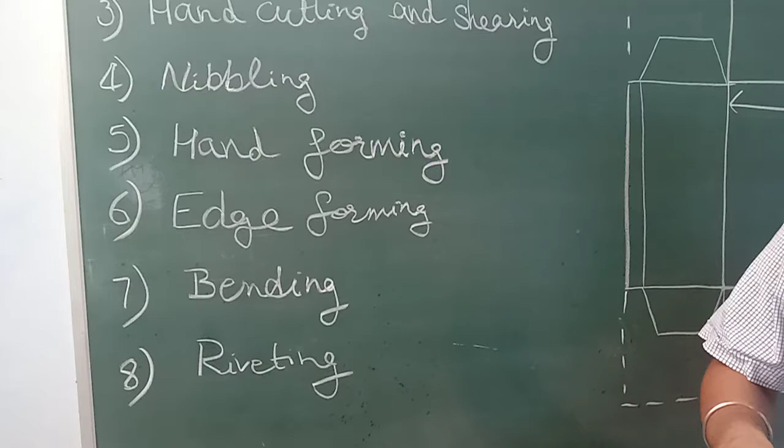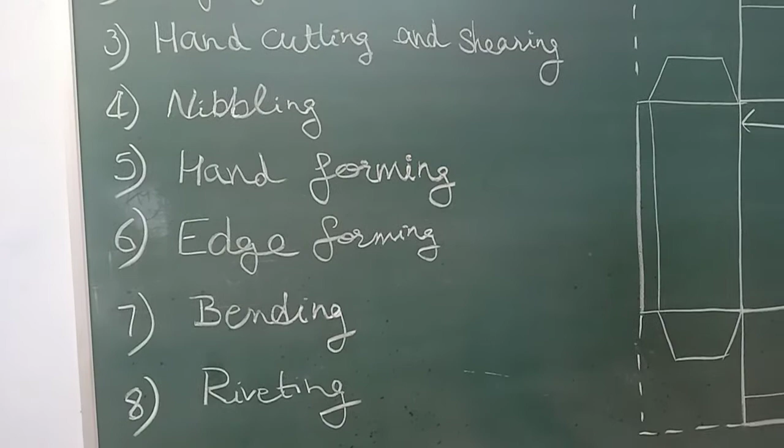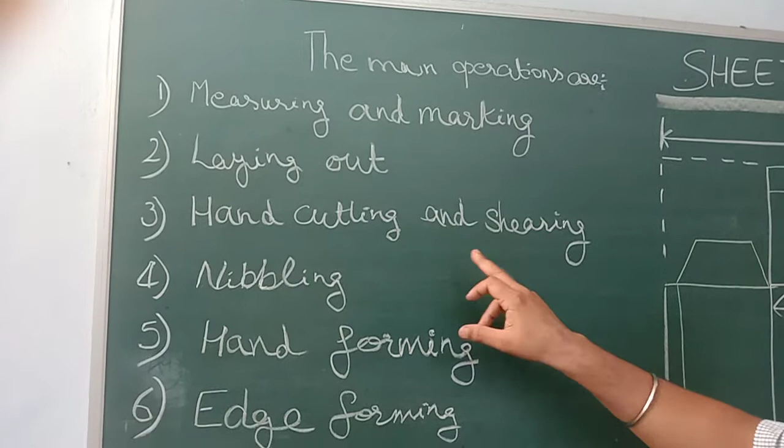Students, in our earlier video, we discussed sheet metal, its applications, types of sheets used in our sheet metal shop, and our first four operations while working in our sheet metal shop. These are measuring and marking, layouting, hand cutting and shearing, and nibbling. Now we come to our fifth operation, that is hand forming.

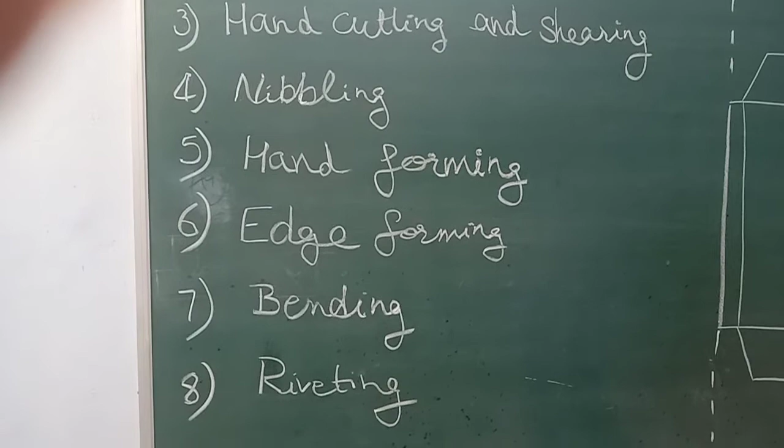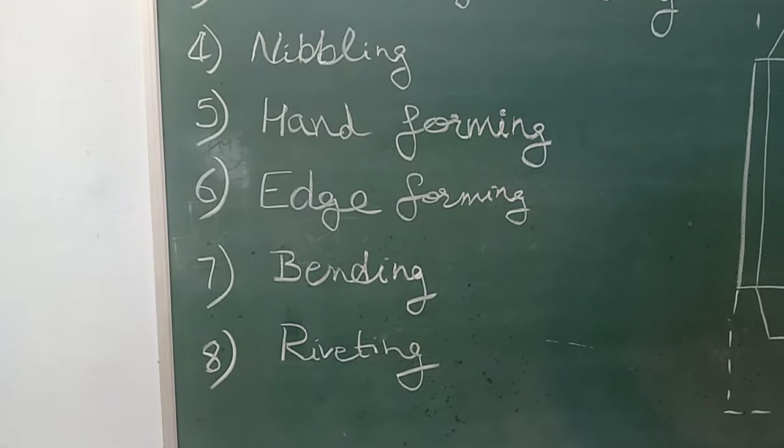Now, in hand forming, the term metal forming, hand forming, stands for shaping and bending of sheet metal in three dimensions in order to give the desired shape and size of the final product. After hand forming, we move to the next step, that is edge forming.

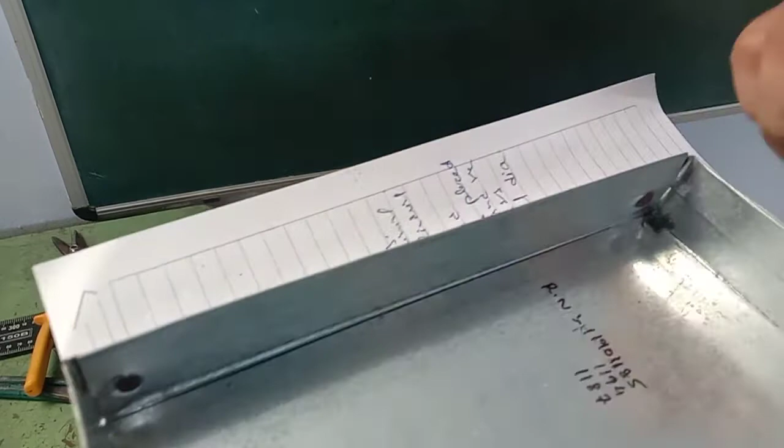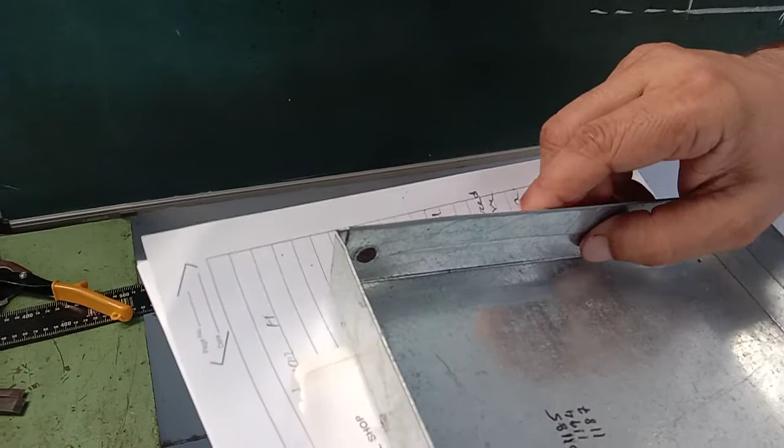The edges of sheet metal products are formed to ensure safety of hands while handling these products and to provide stiffness of the product. This is edge forming. Edge forming is important to ensure the safety of our hands because sharp edges of sheet are harmful for our hands.

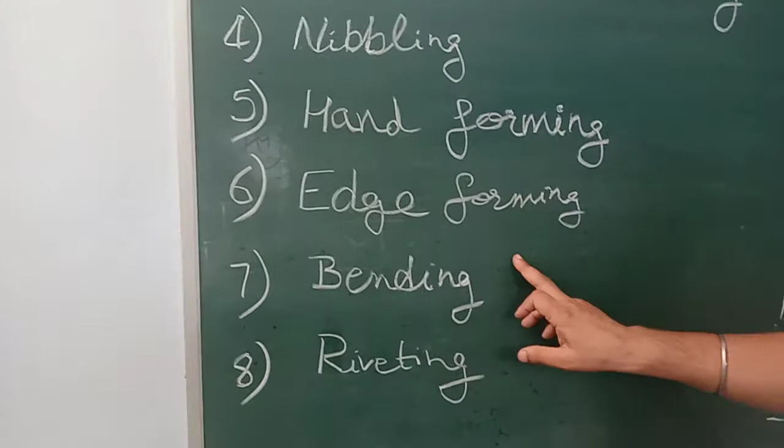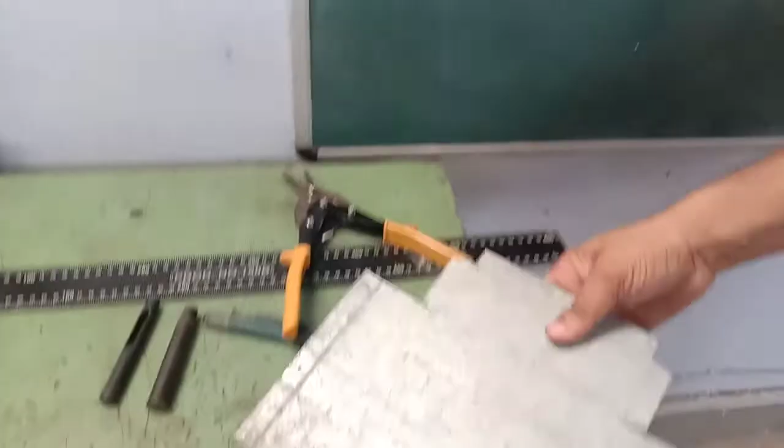Now, our next step or seventh step is bending. Sheet metal is required to be bent in different angles to shape it in the required form. This is how bending is done. Here bending is done at a 90-degree angle.

The bending operation involves stretching of metal on the outer surface and compressing it on the inner surface along the neutral line, which remains unchanged in length. Sheet metal can be bent by hammering over a base by hand or by means of bending or rolling machines.

Now, our final operation is riveting. Riveting is the final operation. It is a permanent mechanical fastening. A rivet consists of a cylindrical shaft with a head on one end, and the opposite of the head is called the tail. On installation, the rivet is placed in the punched or drilled hole and the tail is upset so that it expands to about 1.5 times the original diameter.

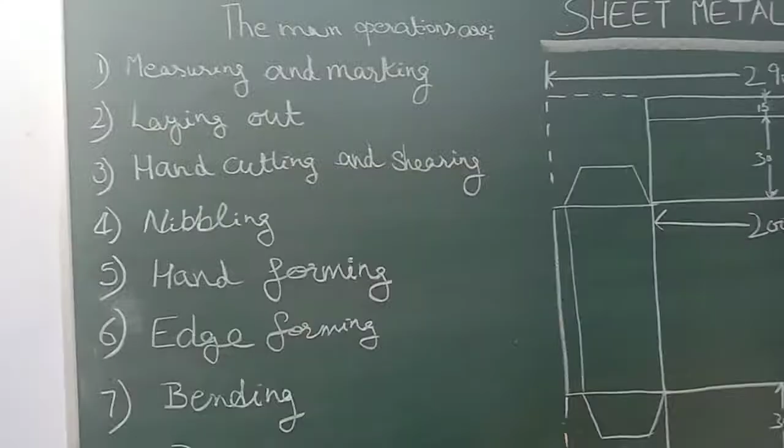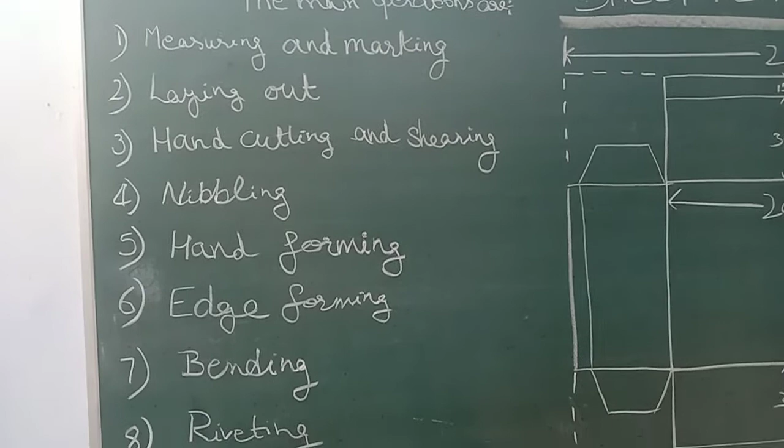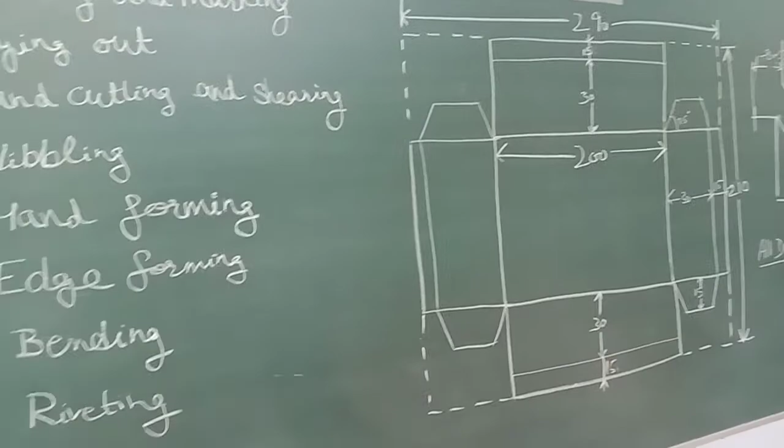Dear students, in this part and in the earlier one, we discussed sheet metal and its application and 8 operations, that are measuring and marking, layout, hand cutting and shearing, nibbling, hand forming, edge forming, bending and riveting. These 8 operations are required to complete our job work, that is our rectangular box. This is our rectangular box, our finished product from the sheet.

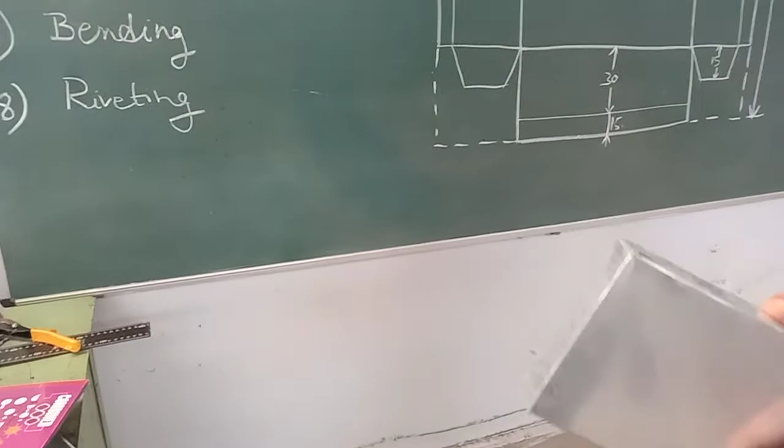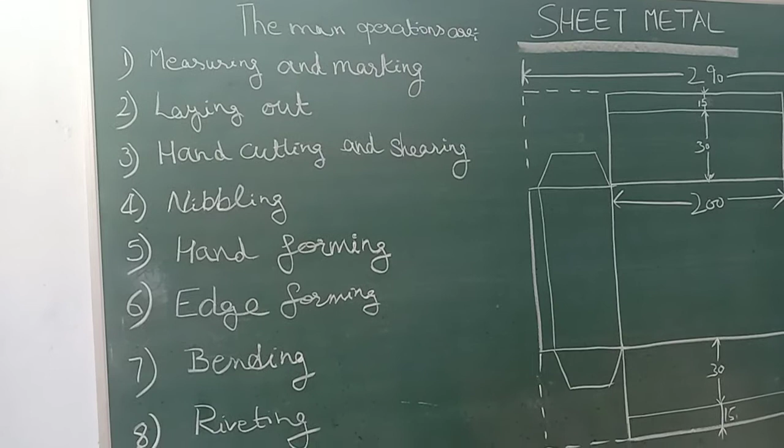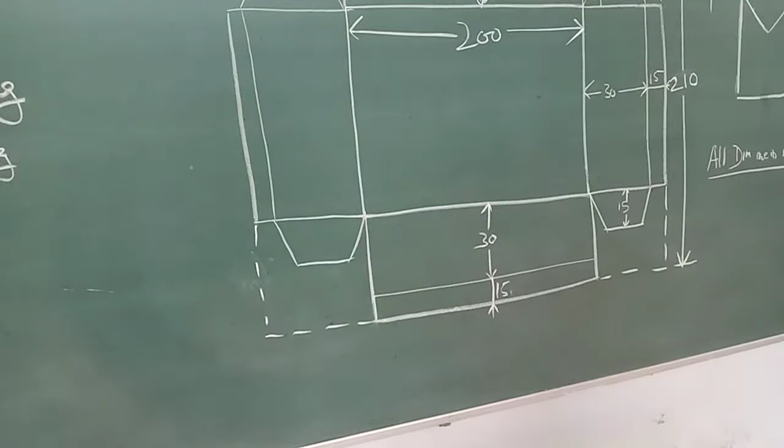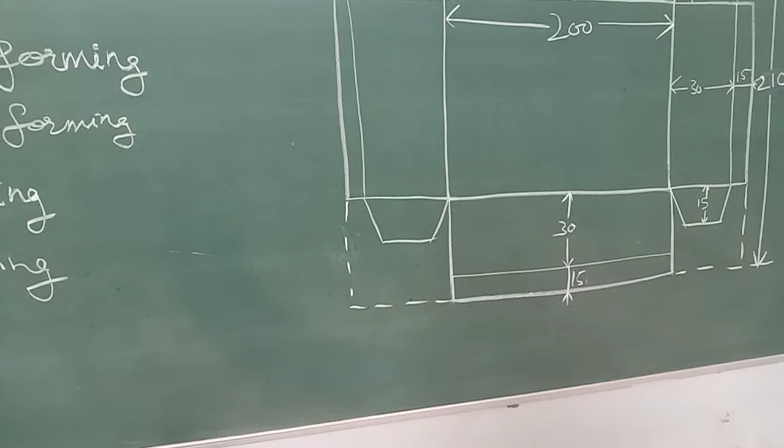As we discussed earlier, measuring and marking is done on a big piece of sheet that is then cut with the help of a shearing machine. Measuring and marking is done by measuring and marking tools, and then our layout is done on the blank. After layout, these portions are cut with the help of a cutting tool, that is a straight snip. After cutting from all sides and all dimensions, we have to check its dimensions perfectly so that our rectangular box is in perfect shape and size.

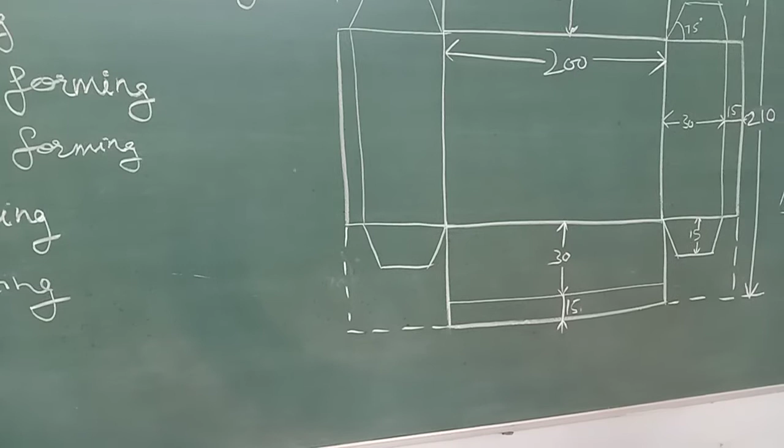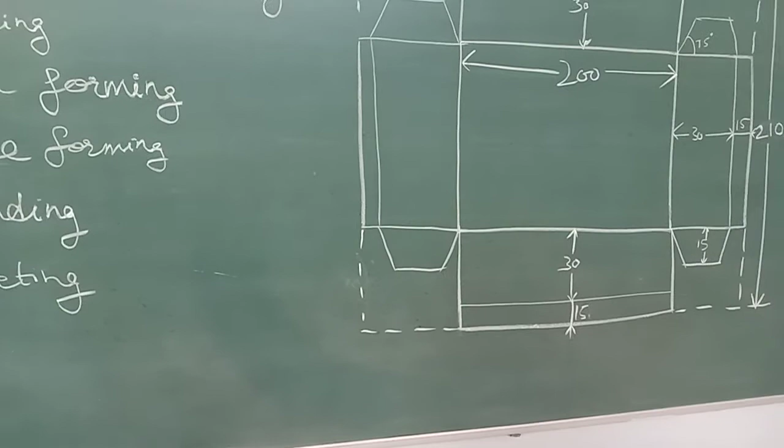After cutting and shearing, we move to hand forming, edge forming, and further bending, which is done with the help of hammers. We use a mallet for bending its edges, and also we use a bending machine. And finally, for fastening our rectangular box, we use rivets. These are rivets.

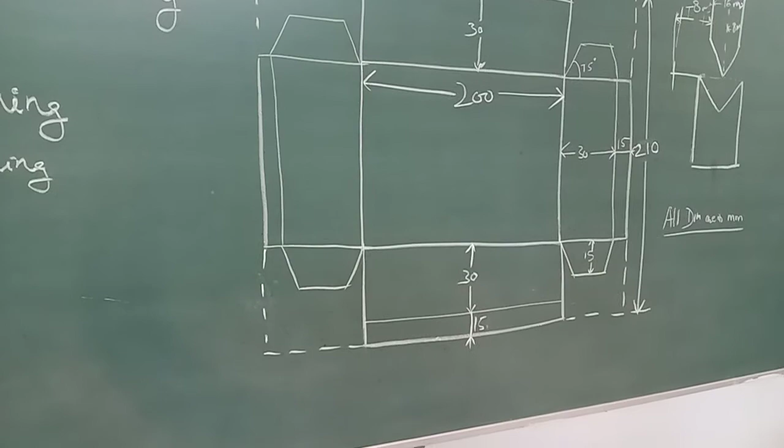You should clearly see the rivets here, like this. This is the head of the rivet, and on this side it is known as the tail. Now in the coming lecture, dear students, we will move further to explain this work further. Thanks.